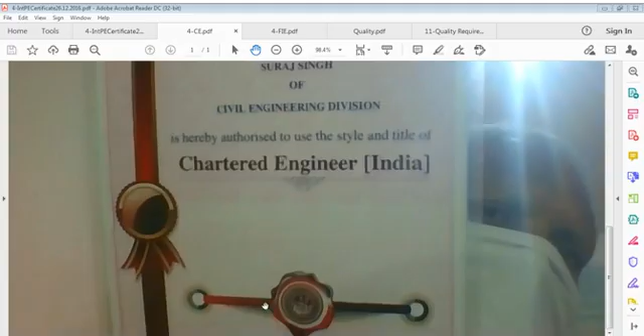Certification is an issue. We all have certain levels of certificates. For example, I have the Fellow membership certificate, FIE, given after long experience in engineering and post degree. This Chartered Engineer certificate is claimed by every corporate member of the Institution of Engineers, the Chartered Engineer India certificate. There is also professional certification for those who are well advanced and experienced, and use that expertise. I'm not an expert, but according to rules, I'm considered an expert.

Then there are varying explanations pertinent to quality - what is quality, why we consider this - and certain checklists for various activities in engineering and construction, particularly civil. More files and sketches will be displayed during this talk. So far I have delivered many related or non-related issues to you.

Meanwhile, I'll close these certificates because they will just hold memory or nothing. So I'm closing quality CE.

Now the question arises about quality - what does quality mean? Every day I take some time to define the approach towards quality. Every day my mind tells me to speak more and more on this issue, and that's all right. We speak because something comes to mind, and that should not be held back or arrested - it should be used. I think that's the best way.

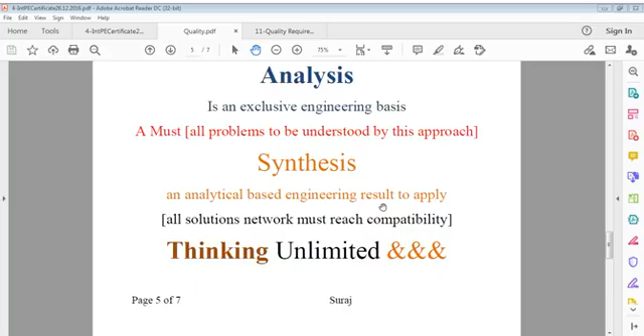It's very difficult to be constructive in this world. Constructive means you have to do a lot of work. You have to do a lot of work if you want to be constructive. And if you want to be destructive, I think it's not that difficult. You can go to someone and kill him. Maybe you are jailed, but you killed, you were destructive.

Construction or constructive activities are very difficult, not exciting. Every construction activity takes time, it requires energy, and it requires knowledge. Then it requires resources, only then we can construct. It's a long process, an intellectual process, a hard working process. We can do construction, but it's a long and time consuming job.

But destruction, just throw one bomb at someone and there can be destruction, that happens. So if you are a constructive person, I think you are a friend of God, or you can say you are supported by God, God shall support you otherwise also. But this constructive activity, I don't mean construction of buildings, I'm talking of construction of every activity based work.

All construction can be done only by those who are patient, who are ambitious, who are interested to help this world develop by their efforts, and those people are always criticized by those who don't want to work. I mean to say there are two kinds of people mainly: one who are work oriented, who are construction oriented, and others who either use construction done by others to claim it's theirs, or they only do destruction work.

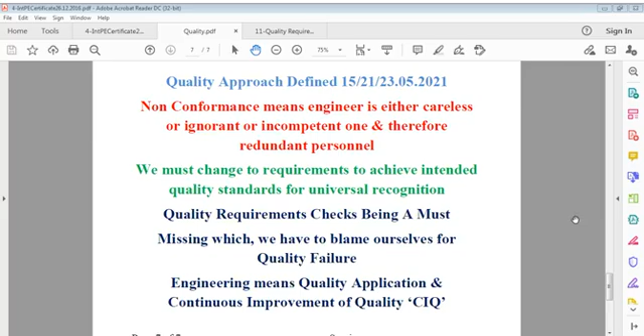To some level you are incompetent, but you worked. If all the time you repeat the same thing, in that case I cannot say that you are a good person, because a person who does work never ever expects that work should be incorrect. As much as possible, to practical limits, work is good, it is okay. That is the main point here. There can be no better definition to understand such analysis. So we can say non-conformance means an engineer is either careless or ignorant or incompetent, and therefore redundant personnel.

We must change to requirements to achieve intended quality standards for universal recognition. Meaning we have to change, we can change because standards change. I'm not much concerned about recognition, but my own recognition I have to do. If I can recognize myself, meaning I thoroughly check my work and I find errors, I try to correct that. That is also a kind of self recognition.

If I am self examiner, examiner is examiner, whether you examine yourself or you examine someone else, same principles apply. Only difference is that you don't tell others I have examined, I have tested myself. You test yourself or you test someone else. If you apply the same principles to yourself, you will correct yourself. Meaning self-study, self-search is very important for those mature people. For kids it's different, but for those who are professionals, they examine themselves, or at maximum peers check them.

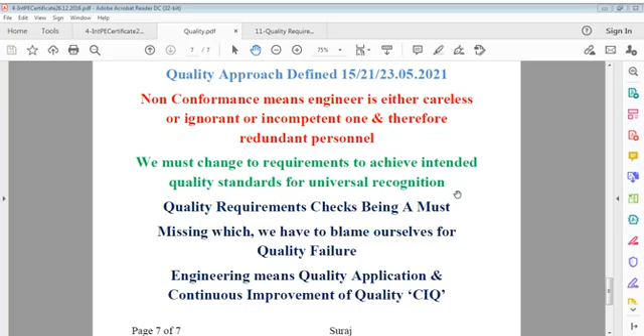Engineering means quality application and continuous improvement of quality. That is what I can say. If I want to improve quality, there is no way I cannot do it, and I have to do it. I have to do it, that is a must. There is no way, you have to do it because it is your job. It is your job, you have to do it.

This is the area for problem, and this is the area for solution. And gradually that format is developed based on your site experience, based on your success. And to get further success, that contemplated formula helps you. That is a very, very important point. Contemplation, that contemplation cannot be achieved conveniently. A lot of work is required to do that, and it's not easy for everybody.

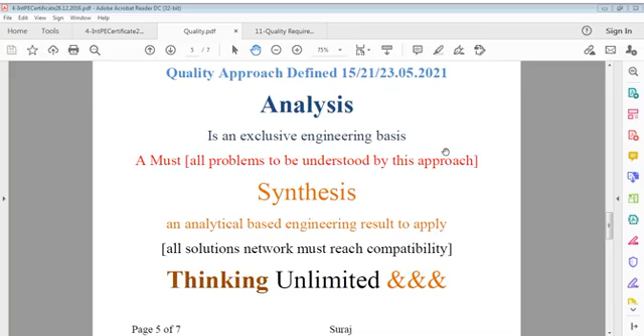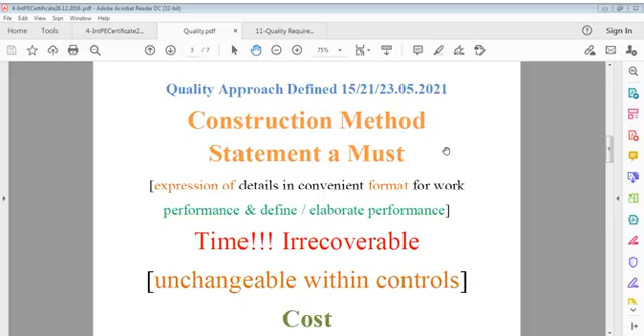Now, I think every day you cannot explain all this, but this analysis and thinking, I count this, and we apply this to our structures, our risks, our reliability. Many times I explain to you construction methods and designs of structures and others, which are part of my profession. Though I'm not an experienced designer, not that educated or experienced, I'm an ordinary person.

But this is a very important point: structures and designs must be qualitative. Qualitative means each step should be clear. Our relative understanding of material properties and materials, and our formulas, must all be clear and clearly applied, clearly understood, and then reapplied and re-understood. We can learn a lot by designing.

I don't mean to say you design like STAAD Pro or some other software. Design means your thinking of design, your assessment of design, what you understand by this. Sometimes we have to talk to ourselves to understand design, or talk to the structure itself, to understand how it's going to behave, how it's going to conduct. We can think this way or that way. And of course there are experiments, various tests conducted, models tested.

So design of structure is a different world. It starts with simple designs, very, very simple designs, and it goes to framing, and framing goes to multiple framing, and then it's called a structure, not a structural member. In every structure there may be hundreds of members, and every member has different properties, different applications, different formulas, and then of course material.

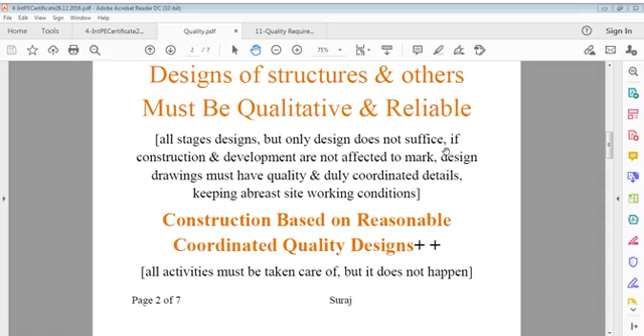Thinking has many ways, and I would not say all are good or all are bad, it depends. But as far as quality is concerned, I think no one has a right to compromise with this, because if you compromise, you don't just compromise quality, you compromise your conscience, your own faith, your existence. You should think that way, because I don't know what you get by spoiling quality, what benefit or achievement you get. I can't understand, and I don't want to understand that either, because unnecessarily wasting time is no use.

The world gives us time for positive works, for good works, for development works, not for unnecessarily making some good thing into bad, some good existence into bad. This is not taught by engineering or education. It's very important. So can I say quality is required everywhere? This cannot be defined, this statement cannot be defined that way, but in engineering it's a must, and if it's not a must, then your engineering shall fail.

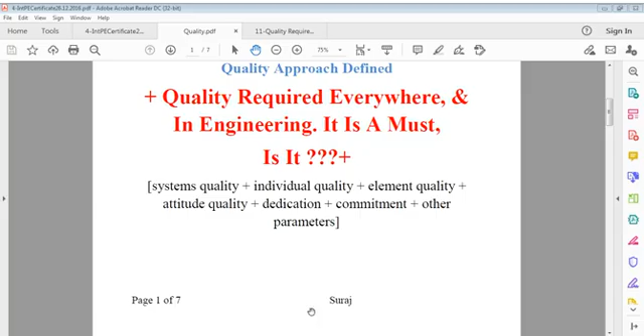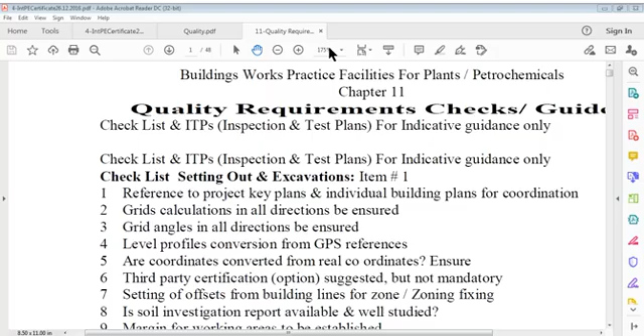That can be done. I think enough time today also I've taken for this part of the talk, and now I have to move to the other part, which is quality requirement. Again, we had discussed this yesterday, and we reached some point, and we had talked partially about that.

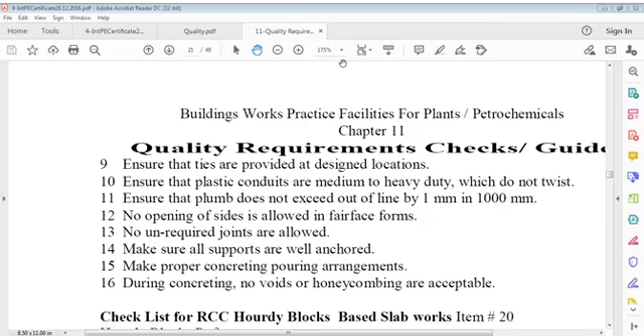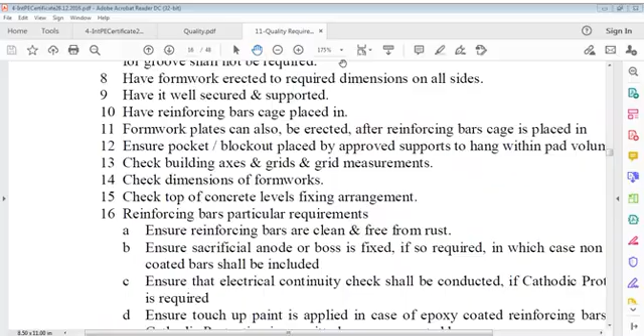What was left is, okay, I have to go a little back. Slab was over, and generator foundations, I think it was talking of something, or no? Yes, slab was over, slab over, pedestal footings. Okay.

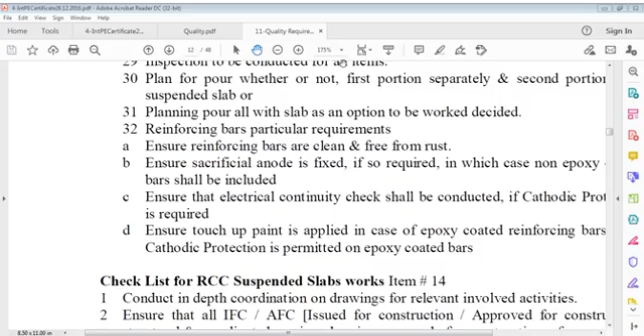Suspended slab. So this was over. Item number 14 was over.

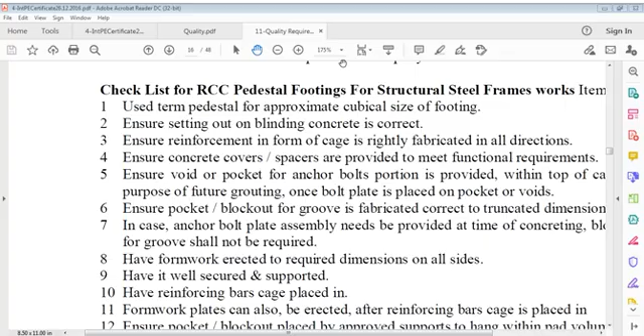So now, I think I spoke about this. Let us repeat this because it's very small, not a big one, it won't take much time. Contemplating on checklists, that's RCC pedestal footings for structural steel frameworks. This is not massive size footing. These are ordinary footings, but thickness or depth is more.

In this case, because there is embedment of structural steel framing columns into this footing, it's not that kind of footing of a building, RCC framing. It has to carry some bolts, you can say anchor bolts, or directly, even sometimes your structural column member could be embedded, but usually bolting is preferable, anchor bolting is preferable.

So what is done in particularly non heavy load bearing members of framing, small footings are done, for example 1 meter by 1 meter by 1 meter, or 1.5 meter by 1.5 meter, like that, depending on type, depending on soil conditions, and depending on so much. Where there is framing members up to 15 meters, 20 meters span, just framing is there, so you can say hall may be that much.

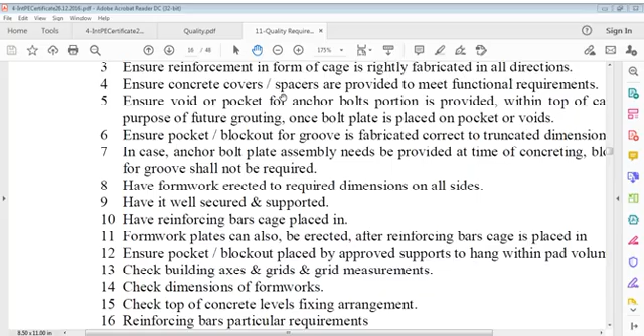So ensure reinforcement in the form of a cage is rightly fabricated in all directions, and ensure concrete covers and spacers are provided to meet functional requirements. Ensure void or pocket for the anchor bolts portion is provided, or grooves you can say, within the top of the cage, for the purpose of future grouting.

Once the anchor bolt plate is placed on pocket or voids, ensure the pocket blockout for groove is fabricated correct, or as designed, to truncated dimension. Truncated means the bottom portion is wider than the top portion, so that if friction is created, more value is created, and it is on all sides of that block, purely fixed on formwork, well anchored, with no disturbance during concrete.

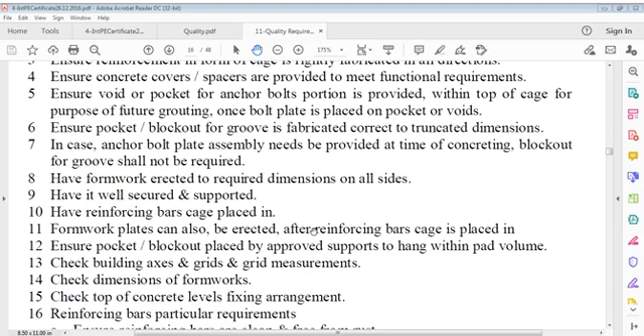So ensure pocket blockouts for groove are fabricated correctly, auto requirement to keep as close as possible to truncated dimensions. In case the anchor bolt plate assembly needs to be provided at time of concreting, blockout for groove shall not be required. Now have formwork erected to required dimensions on all sides.

Have it well secured and supported, meaning the formwork. Have reinforcing bars cage placed in. Now formwork plates can also be erected after the reinforcing bars cage is placed in, either way. Nothing wrong with that, because it's a small case and people can sit there like in a foundation, it doesn't matter.

Now ensure pocket blockouts are placed by approved supports to hang within the pad volume. These are the blockouts we have fabricated already, and we have to place them at the position where the anchor bolts have to come in, and we hang them with some lumber or timber pattern so that they stay stable and can be easily controlled during concreting.

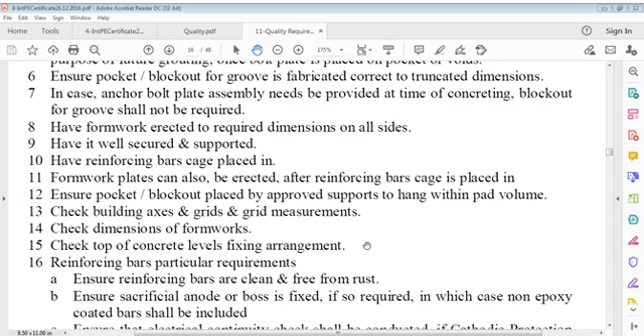So formwork plates can also be erected after reinforcement is placed in, and pocket blockout placed by approved supports to hang within pad volume, and check building axes and grid measurements. That's very important. As I usually said, we must establish axis on both directions, x and y, and then we can measure our grid distance from that axis.

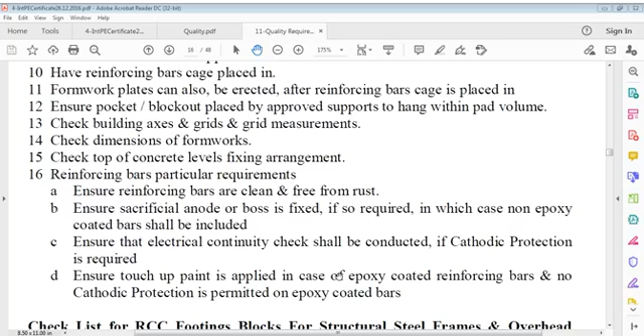Also check building axis and grid measurements, and check dimensions of formworks. Check top of concrete levels and fixing arrangements. Then reinforcing bars particular requirements, which is for all steel, and again that is there.

Ensure reinforcing bars are clean and free from rust. That's very important. Rust is very common in our country, and people least bother about that; unfortunately even engineers keep silent, for reasons I don't know. All rust should be removed from bars before being embedded in concrete. Ensure reinforcing bars are clean and free from rust.

Ensure sacrificial anode or boss is fixed if required by design, in which case non-epoxy coated bars shall be included. I mean, if you use non-epoxy coated bars, sacrificial anode can be placed in, and cathodic protection can be applied or inserted for corrosion control.

Ensure that electrical continuity test or check is conducted if cathodic protection is installed. And ensure touch-up paint is continuously applied in case of epoxy coated reinforcing bars, and no cathodic protection is permitted on epoxy coated bars. There should be no place left where the epoxy coat is broken or scratched. Whatever defect is seen on each steel bar, we have to keep epoxy coating paint applied at all times by small brush, and without that there's no meaning in embedding this bar in concrete. So this touch-up paint is a regular application on all bars.

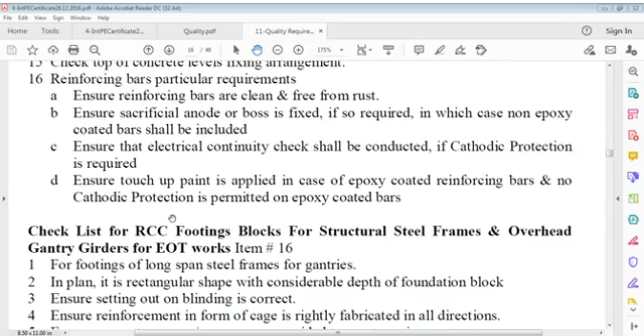We can now see the checklist for footing blocks for structural steel frame, or overhead gantry girders for EOT cranes, or EOC, electrical overhead cranes, or travelling, doesn't matter whether I've written EOT or EOC, you have to understand the basic point. For footings of long span steel frames for gantries in workshops or factories, in plan it is often a rectangular shape with considerable depth of foundation block.

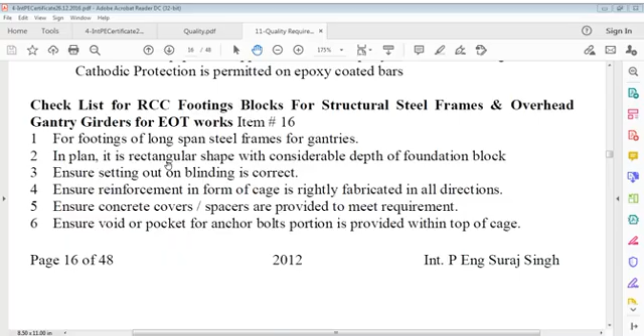Ensure the setting out on blinding is correct. Ensure reinforcement in form of cage is rightly fabricated in all directions. Ensure concrete cover or spacers are provided to meet requirement, and ensure void or pocket for anchor bolts portion is provided within the top of cage. These are same as before, so we have to repeat the same activity as we did before.

Ensure pocket blockout for groove is fabricated correctly, suitable and fittable to truncated dimensions. In case anchor bolt plate assembly needs to be provided at time of concreting, blockout for grooves shall not be required. If you hang your anchor bolts in prefabricated plate as delivered and cast in with concrete, there shall be no requirement of groove, and the bolts would be directly embedded into concrete. It can happen, but generally we don't do that.

Have formwork erected to the required dimensions on all sides, generally four sides. Have it well secured and supported, usually with the system discussed many times. Because you cannot bolt within that, we have to be careful so that sides don't open. That's the important point - sides should remain intact during work, with no movement and no bulging.

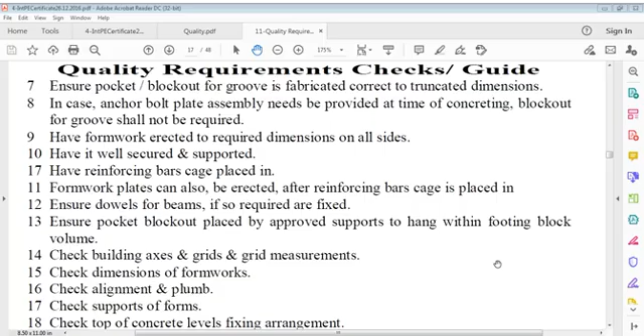Then ensure pocket blockout is placed by approved supports to hang within the footing block volume. If you use the installation of grooves method, you have to take care again - there may be many such blocks to be installed in one footing at different locations given in your design. Keep ready for inspection and pouring.

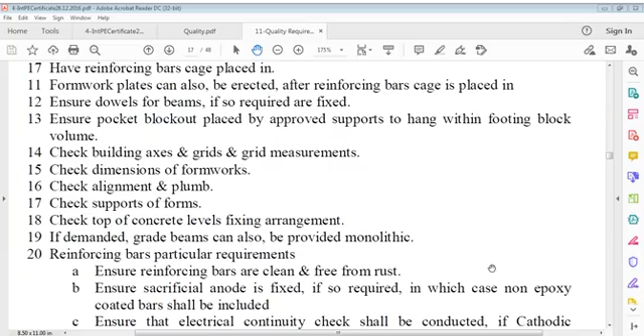Check building axis and grids and grid measurements. Check dimensions of the formwork that you have placed in. Check alignment and plumb as usual - there should be no deviation in alignment and no effect on plumb. All should be within limits.

Check supports of forms, and check top of concrete levels, fixing the arrangement up to which point you are going to pour concrete from these pads or blocks. Fix the top of concrete level by some method, by fixing beads or chamfer on that, or whatever means - put marks for the concrete people to stop concrete at that point.

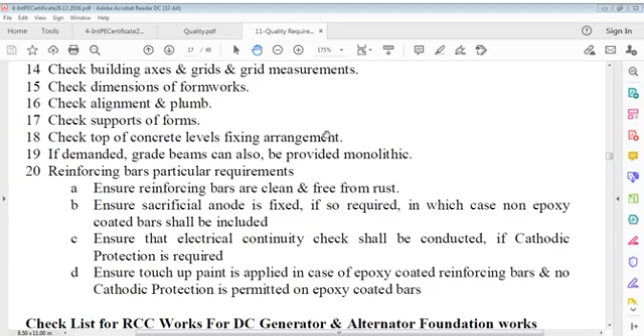Ensure reinforcing bars are clean and free from rust, as usual. No rust is allowed - you have to remove rust, no way out. If you don't remove rust and all dust, don't use these bars - remove them, or remove rust using a hard brush, rubbing on those parts, or taking out all those scales and coatings.

Ensure sacrificial anode is fixed if so required, in which case non-epoxy coated bars shall be included. This means when sacrificial anode is designed to be installed, epoxy coated bars would not work.

Ensure that electrical continuity check or test is conducted if cathodic protection is installed. Because there are C clamps on each bar, all these clamps embed a GI wire, and continuity of this activity of anode and link to cathode is done through this wire, which is moved around all steel bars and fixed. Then we ensure the electrical continuity check test is conducted.

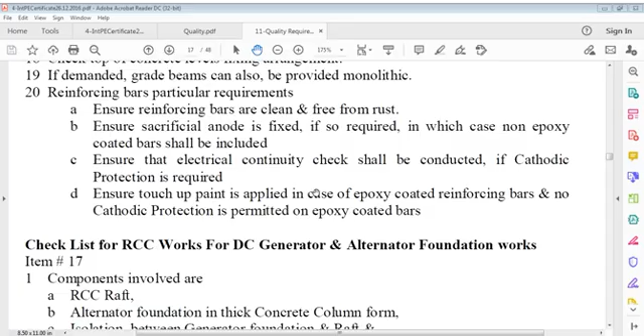It's a very simple statement, nothing too specific in this. You can understand this item, it's a very good item you may say. Then we'll talk of DC generator and alternator foundations. Let us see if I can find something, I will be happy.

In this case, I can say possibly I will not find that one. I'm trying to find it. I will try to tell all this as much as possible.

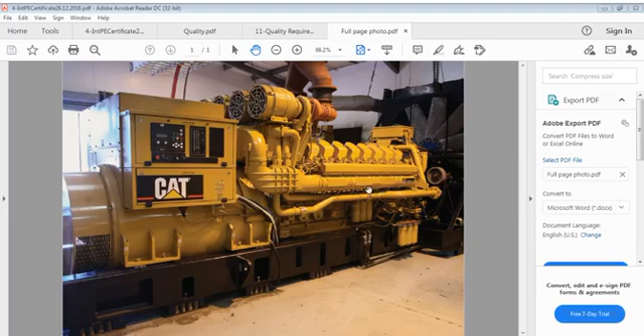I'm not talking about the mechanics of this, you know that there's so much in that. You see these points here, right? These points I'm talking of are shock absorbers. These shall rest on something, on some hole. This machine is very vibratory. Impact shall be transferred to the foundation, and that foundation I'm talking of.

This machine, first of all, is a generator, and this shall be connected to an alternator through some system of work, but independently this would work. This is all a mechanical system. These are all frame of this frame, and this vertical part is shock absorbers. Now this shall rest on some frame, and that's foundation.

There shall be an isolation between this foundation and foundation of this machine, that's the frame block, a massive block which shall rest on raft, and there shall be an isolation arrangement between raft and foundation of this machine. This means on top is the massive block, below the massive block is the isolation arrangement, and below that isolation arrangement there shall be a raft. The alternator foundation shall be integrated with the raft in a monolithic way.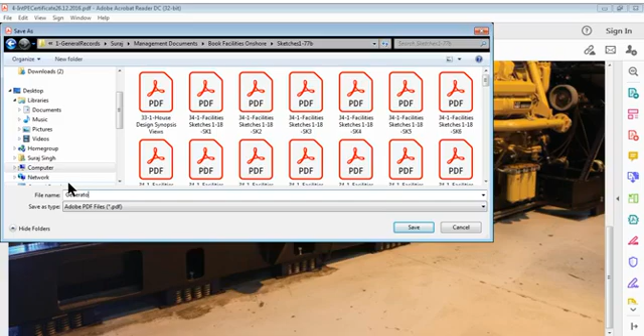We have to provide a foundation system for this, meaning a system where there is a machine of generator and alternator. We have to form that one for this machine. This is what I am going to talk about.

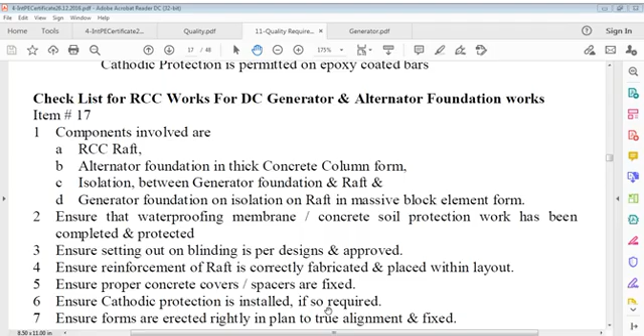A massive block directly below this, and below the massive block there is isolation, and below isolation there is its real foundation. This massive block is the supporting foundation, and that raft is the distribution-of-load foundation, because the raft shall distribute static load, while this massive block shall dampen all its impacts, and the isolation block shall try to dampen further. This is what I understand, and this is what I am going to talk about in this activity: RCC works for DC generator and alternator foundation works.

We have to discuss this one by one, and that's a very important part of this.

I have this block in my book, but that's not here with me, and I don't have any file where I can see that. Sorry, this is another sketch, I have to see that one as I'm talking. House design, I wanted to show you if I can have that, but I don't have that one. So no problem, I will now go this way and see what we can say about this.

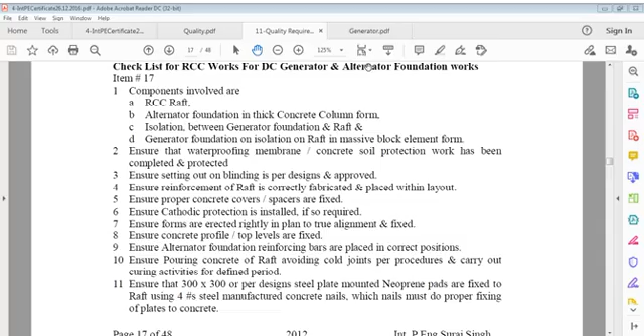So now we start about this item, which is very important. I did this myself long back, but with different technology at that time. This is a very important item.

What I want to say is: checklist for RCC works for direct current generator and alternator foundation works. There is a combined type foundation for both generator and alternator in the form of a raft. On one end, say the left end of this long raft, there is a thick column on which we have to mount the alternator.

On the other part, away from the alternator column, say 1 to 1.5 meters, we have an isolated mounted massive block. This means that massive block is not connected in any way to the raft, but isolated from it by an isolation mechanism sandwiched between the raft and the massive block. On that massive block, our machine has to be connected through a bolt system.

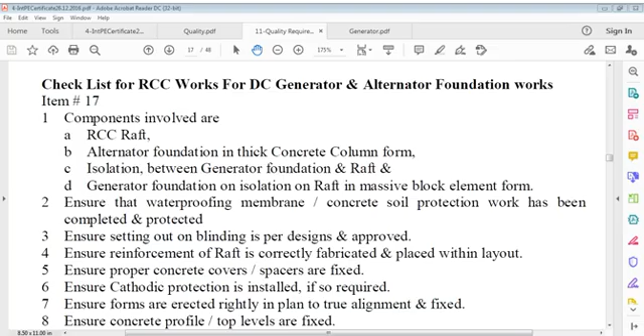Now the components that they have, components which you can enlist: one is the RCC raft, the other is the alternator foundation in thick concrete column form.

Thick concrete, you may question, it's easy to answer, but let me finish this first. Then there's isolation between the generator foundation and the raft. Generator foundation means the massive block and raft, and generator foundation isolation on the raft in massive block element form. So these are the points here.

Now there are 2 points: thick element of RCC and massive block. You may ask this question if you do not know, it's fine if you do. Thick element means whatever RCC member has a least dimension of 800mm or above.

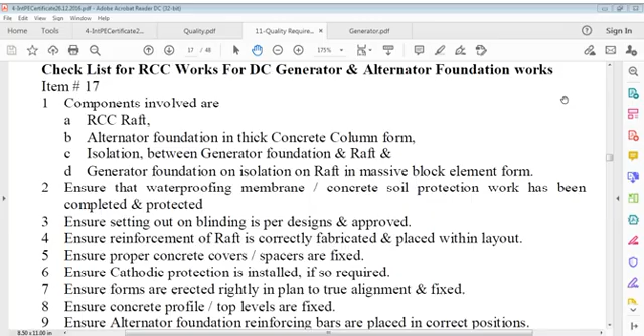Now we again go to the same excavation, which we assume is done, everything is done. We are not going to repeat all those. Just start with the waterproofing membrane or concrete soil protection work that has been completed and protected. We assume that.

Now setting out on blinding is according to designs and approved. Blinding is already over.

Reinforcement of the raft is correctly fabricated, we assume, and placed within layout. It is not easy, but we have to assume reinforcement is according to structural design. The site has received reinforcement of the raft, probably fabricated, or fabrication can be done in the site yard - reinforcement concrete steel.

There are two yards: one for formwork and one for steel bars. Steel bar people fabricate steel, cut and bend according to design, and those who work on formwork fabricate it according to dimensions.

Proper concrete covers are needed, and these must be fixed on the steel. Wherever required in the case of the raft, it is done below the steel of the raft, and also above as well as on the sides, where the thickness is not much - it may be 400 or 500mm.

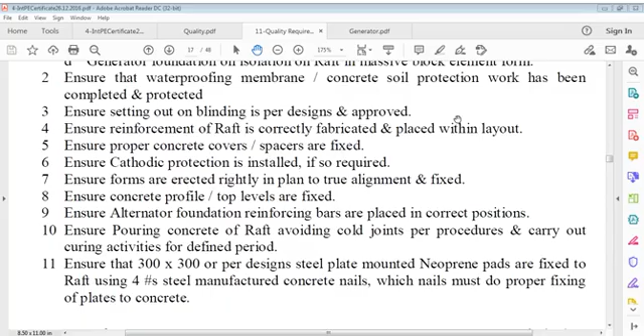Ensure that 300 by 300, or as per design, steel plate mounted neoprene pads are fixed to the raft using 4-number steel manufactured concrete nails. We'll take this up now, it's a very important issue.

After this, the nails must be properly fixed. This is after the raft is done, after curing is over, everything is hardened. So we have to follow the design, and we must get these pads when we procure material for this foundation isolation, because these neoprene pads are a form of isolation.

These neoprene pads are fixed on steel plates of 300mm by 300mm, or whatever design, with 4 holes at the corners. The 4 holes are meant for the purpose of steel nails.

So we generally call them concrete nails in our field. Concrete nails, though these are not made of concrete, but are made for the purpose of connection to concrete, because these are made of steel, and the point of steel can penetrate into concrete, and that's the reason we call them concrete nails. But these are steel nails. Other nails which are used for timber work, wood work, those are wrought iron nails. These are steel nails, and that's the only difference.

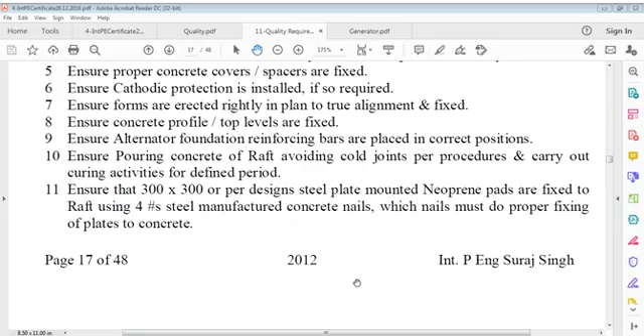Around this neoprene pad, 4 holes are provided for the purpose of nailing to concrete. So ensure that the 300 by 300 mm, per design, steel plate mounted neoprene pads are fixed to the raft using 4-number steel manufactured concrete nails, which must do proper fixing of plates to concrete. This is a very important item.

Now you have to check that polystyrene rolls are spread on areas of the raft, but saving areas covered under the neoprene pads, so that the prefabricated lamina plate rests on polystyrene. This is important to understand. What I'm saying is, but I don't have a sketch, I'm regretful for that.

But you fix these pads like concrete nails, then you have flexible polystyrene rolls, heavy duty rolls - polystyrene rolls, not extruded ones, different ones - and these are spread on the whole area, and we have to cut out within this span. These pads are in the way, so the surrounding pads we have to cover with the polystyrene roll, so that the prefabricated lamina plate rests on polystyrene. Provide a neoprene rubber sheet, the same rubber sheet, on the whole system laid on the raft.

So you have laid these neoprene pads with steel mounts, and you have laid the polystyrene roll, and now the neoprene rubber you have to lay. These are the three items we have laid on that raft. Now place the following: the fabricated plate based on laid system. This fabricated plate or lamina is to be laid on this system, reinforcing per particular requirements. This fabrication of plate I'll discuss separately.

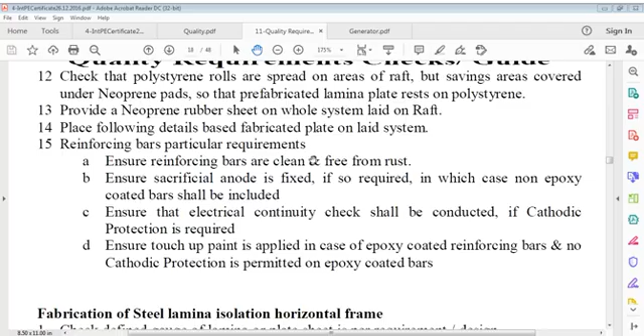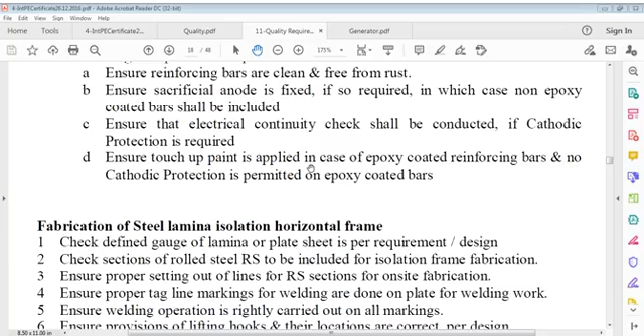Now, just because we have provided steels, we have the same comments: ensure reinforcing bars are clean and free from rust and dust. Sacrificial anode is fixed if required, in which case non-epoxy coated bars shall be included. Also ensure electrical continuity check is conducted if cathodic protection is required, and ensure touch-up paint is applied for epoxy coated reinforcing bars. No cathodic protection is permitted on epoxy coated bars.

Fabrication of steel lamina isolation horizontal frame. This is a very important item actually, and this is what isolation is all about. You have to understand this. Fortunately, I was personally involved in one such item, back in 1984.

This horizontal framing, the lamina and angles, was supplied as rolled steel angles, mild steel, and the fabrication design was given. I took my own interest in that, because you cannot depend all the time on fabricators for everything. It was a very technical issue.

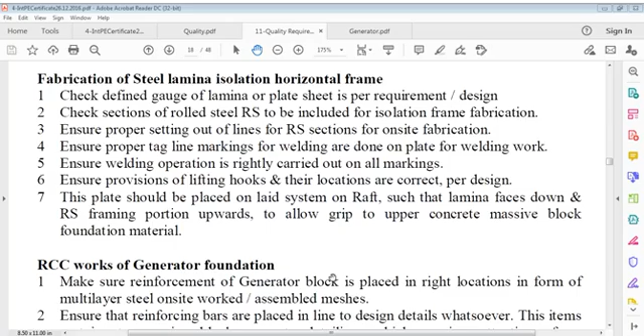Now we go to RCC works, generator foundation. It's very important one, generator foundation, not so simple as we think. It's very much - nothing you can read for 5 minutes at the back, because first reading is important. You may not read when I speak, so better read it now.

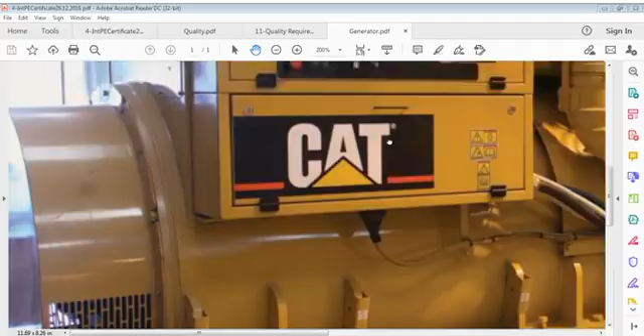So we are back here, and say RCC works of generator foundation. And generator, you have seen what I said. It was this one, which you can see in this sketch again. I can blow it more and more, and you can see how does it look, what is the structure. It looks like, you can see it's like a train there.

You can see shock absorbers like train bogie, and you can see it is, I think, CAT, though I do not use CAT. Well, it's just a question of understanding what we say, what we do. So this is that.

Now, RCC works of generator foundation. Make sure that reinforcement of generator block is placed in the right locations in form of multi-layer steel on-site worked, assembled meshes, right? Make sure reinforcement of generator block is placed in right locations or required locations in form of multi-layer steel on-site worked, assembled meshes.

Ensure that reinforcing bars are placed in line to design details whatsoever. This item pertains to massive block concrete detailing, which requires attention of an experienced engineer or pragmatic foreman who can personally attend to direct its installation, because it being a machine foundation design based on foundation counter weighing. A little complicated one, but we have to understand this as well, because understanding is very important. We have to understand so many items, so many issues.

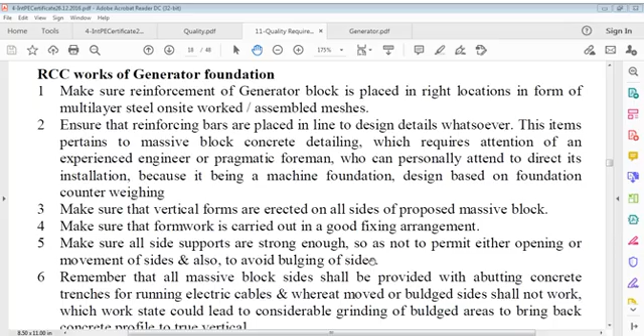I don't think moment of resistance or bending moment are that important in this. It is not, because depth is around 2.25 to 3 meters. So though it's quite a heavy item, it's meant for dampening effect, to achieve dampening effect of vibrations. That's the main purpose, and to avoid, you can say, resonance.

Natural frequency of machine and operating frequency of machine should not tally - that is called state of resonance. You may have forgotten, but operating frequency and natural frequency should not meet together. Operating frequency means frequency imparted or transferred to foundation by machine, and natural frequency means that produced by foundation. Both must not be same. There should be a difference, and what difference should be there is specified in designs, up to 2. So make sure we have to be concerned about that. That's the reason the massive foundation is there.

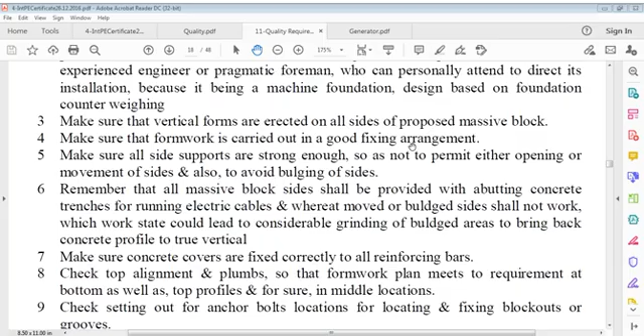All massive block sides shall be provided with abutting concrete trenches for running electric cables. Where moved or bulged sides occur, that work state could lead to considerable grinding of bulged areas to bring back the concrete profile to true vertical. Make sure concrete covers are fixed correctly to all reinforcing bars. Check top alignment and plumb so that the formwork plan meets requirements at bottom as well as top profiles, and for sure at middle locations.

Check setting out for anchor bolt locations for locating and fixing blockouts or grooves as usual, and also for machine foundations where plates and bolts are for installation. If grooves are prescribed in design, provide them according to dimensions given by the designer, since dimensions vary, and these grooves should be properly fabricated of timber. If prefabricated grooves are given, fine, but often they are not, so you have to arrange timber grooves yourself, because this can be broken later. If it's a steel groove, it will remain inside and cannot be taken out.

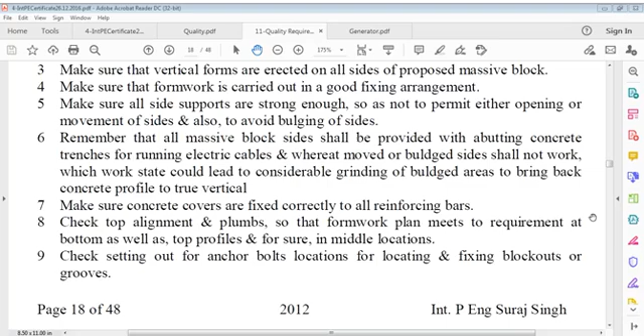Make sure the concrete covers are fixed correctly to all reinforcing bars. Check top alignment and plumb so that the formwork plan meets requirements at bottom as well as top profiles, and for sure at middle locations as we discussed. Top and bottom profiles must be supported by a system that keeps these profiles intact in dimension, orientation, and location. Also check setting out for anchor bolt locations for locating and fixing blockouts or grooves.

Then we move to a further check, and that is checking blockouts and truncated formwork. Check that these blockout forms are fixed in exact position, are truly vertical, and are well anchored so as not to move out of the fixed position.

Make sure about providing cathodic protection if required. In case of cathodic protection, provision continuity tests should be conducted, and that must be done - cathodic protection provision continuity testing.

The activity of pouring and curing is also required here. Every activity must be inspected by a competent person - a competent authorized engineer and a competent quality person - because everybody has to be responsible. So the activity of pouring and curing is to follow the concrete pour plan, which you have to develop yourself. Of course there are ways, and we can show it.

And of course, in step pouring, which I'll show you again, so as to avoid cold joint formations - step pouring is very important. I've shown it many times, I can show it again, it's not a big deal. Let me check if I have that.

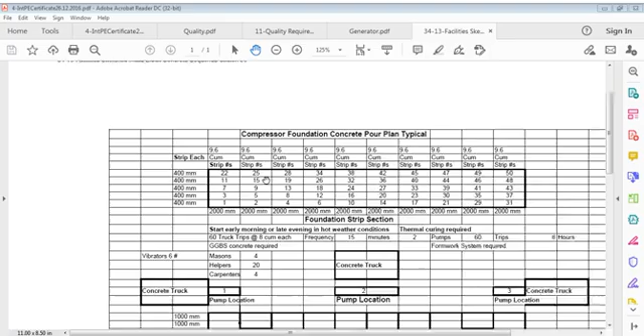Well, I'll take a photograph, I'm going to take this sketch. Let us see this. I don't know why I missed this last time as well, let me do it again. I'll show you just now. This is the important one, and this is the art one. Just for your reference, I'm showing how this should be poured.

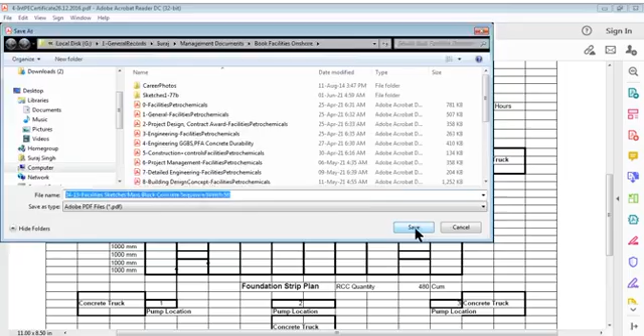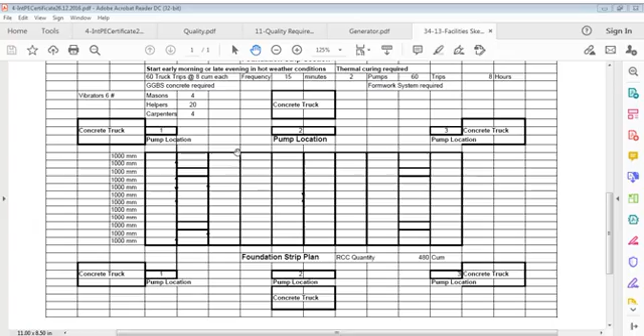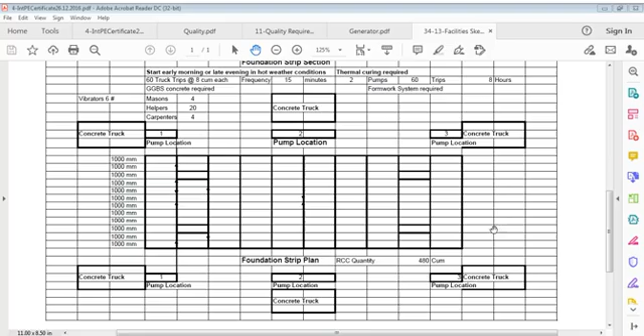This is a section of this, and of course it's a different foundation, but it's a massive block as well. You can see whatever sizes there, you have to go into detail like this. Say 2 meters to take width, and you have to pour this layer. This is a plan actually, and this is just strip sections.

The sequences we have to fix means all cold joints should be avoided. That's the only way it is done, not otherwise. And if you do it fully in one go, then you will face problems.

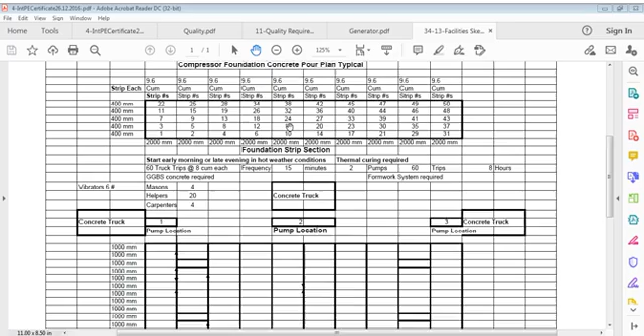Many problems will be faced. Even if you are using concrete pump and fully concreting, say you concrete from here to here, then move further, pour this, and come back to pour this - it doesn't work. At one time you will get cold joints, and at that point the pressure will increase. I'll discuss this later on. It's just for information, I tried to show you this, and I think you understand what I mean.

So as I said, we are here. I put this file off because it's not required at the moment. You can put this file off - why waste unnecessary time?

Check blockouts, truncated formworks - these must be in vertical position and anchored well, and not move out of fixed position. Make sure about providing cathodic protection if required. That depends on the project - if required, you have to do it; if not required, don't do it.

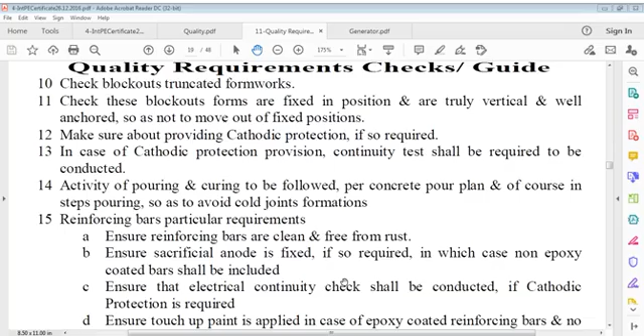Make sure about providing cathodic protection if so required. In case of cathodic protection provision, continuity test shall be required to be conducted, and the activity of pouring and curing is to be followed per concrete pour plan, in steps, so as to avoid cold joint formations, as I explained just now.

Reinforcing bars, particular requirement as usual - I just repeat, it is the same.

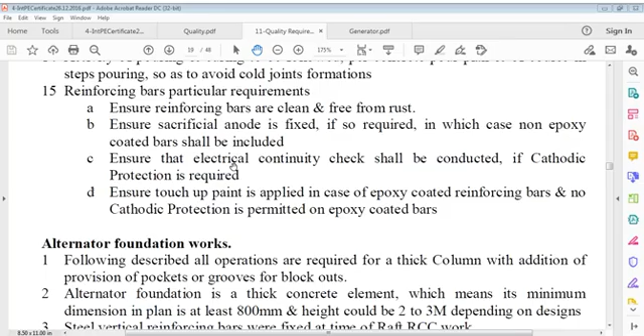Ensure reinforcing bars are clean and free from rust and dust. Ensure sacrificial anode is fixed if so required, in which case non-epoxy coated bars shall be included. Ensure that electrical continuity check shall be conducted if cathodic protection is required. Ensure touch-up paint is applied in case of epoxy coated reinforcing bars, and no cathodic protection is permitted on epoxy coated bars. These are precautionary measures.

Now, alternator foundation.

Following described, all operations are required for a thick column with addition of provisions of pockets or grooves for blockouts. Meaning, we are going to construct a thick column - not a column of that type, it's like a big pedestal.

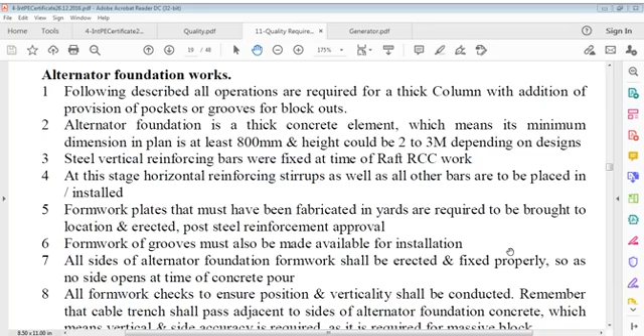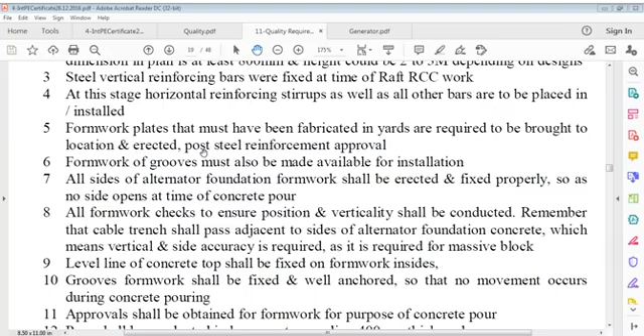So all sides of alternator foundation formwork shall be erected and fixed properly so no side opens at the time of concrete pour. All formwork checks to ensure position intact and verticality right shall be conducted. Remember that cable trench shall pass adjacent to the side of the alternator foundation concrete as well, which means vertical and side accuracy is very much required, as it is required for massive block.

Level line of concrete top shall be fixed on formwork inside. It can be by beads or whatever means. It should be clear to the mason up to what level this concrete is to go or rise. Grooves formwork shall be fixed and well anchored so no movement occurs during concrete pour. Approval shall be obtained for formwork for purpose of concrete pour.

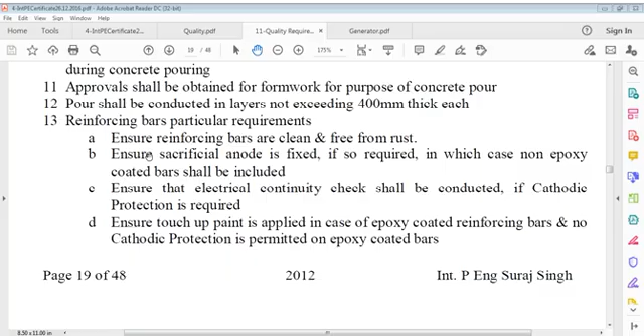Pour shall be conducted in layers not exceeding 400 mm thick. That we'll discuss in reinforcing bars particular requirements, that is, ensure reinforcing bars are clean and free from rust. Ensure sacrificial anode is fixed if so required, in which case non-epoxy coated bars shall be included. Ensure electrical continuity check is conducted if cathodic protection is required. Ensure touch-up paint is applied in case of epoxy coated reinforcing bars, and no cathodic protection is permitted on epoxy coated bars.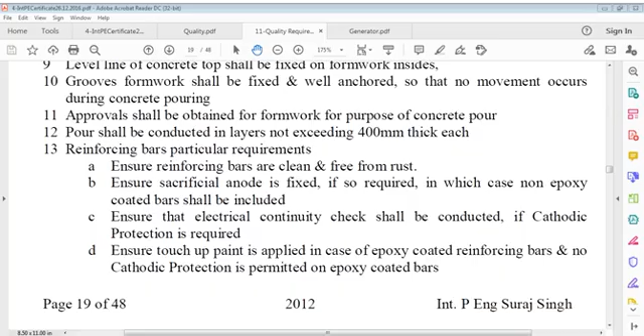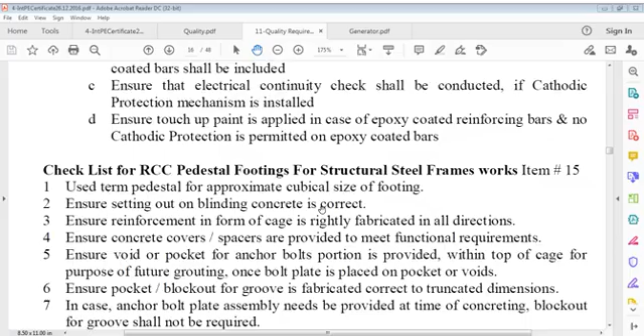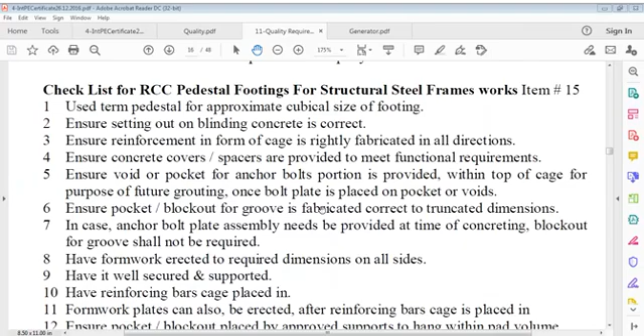This we discussed for certain important items. Important items these are, and we should understand that point. It's very much important. This we discussed, and you can say what did we cover when slab was over - I think that was the slab. So we covered pedestal footings, two types, for structural framing without gantry and structural frame with gantry both. We considered both items, very small description. Then we considered generator and alternator foundations, which are also very important.

If I try to find something, maybe I can't see that. Let us say generator, alternator foundation. There's nothing as such. I think something appears here. Let me see this image. What does it say? Oh, there's so much in that.

Doing something else here. What is this? It doesn't usually ask it, it doesn't do that. Okay, here it is. Let us see if you can say this. HTML is, why it's HTML? Problem is you cannot get some references directly, it's a main problem. It's not giving a result. I'd like to give one reference for your reference only. Oh, it's very small, yet something is written on that. We'll see. No, it's not giving. It's giving something else. Let me try what it says. That's also important, what it says, let us see.

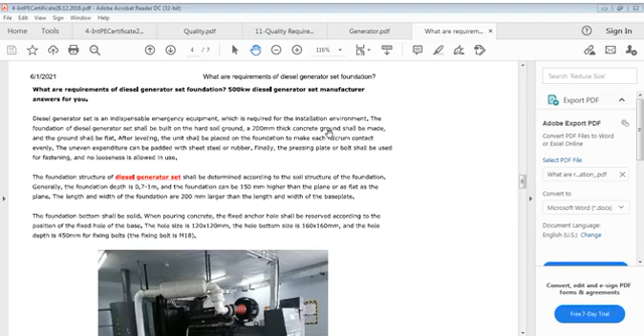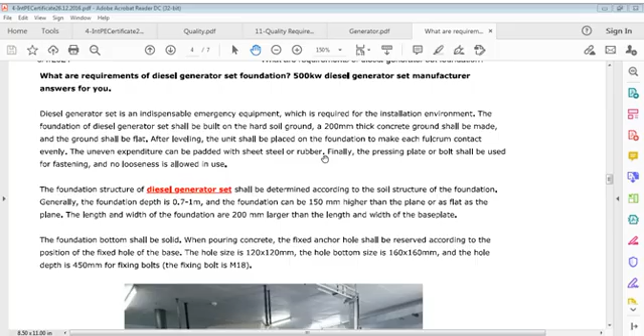What are requirements of diesel generator set foundation? Diesel generator set is an indispensable emergency equipment which is required for installation of environment. Foundation of diesel generator set shall be built on hard soil. A 200 mm thick concrete ground shall be made. Oh no, this is rubbish, leave it behind, I cancel this. I was talking something reasonable and it should be heavy. It's not giving me that one, so I close it. It's rubbish.

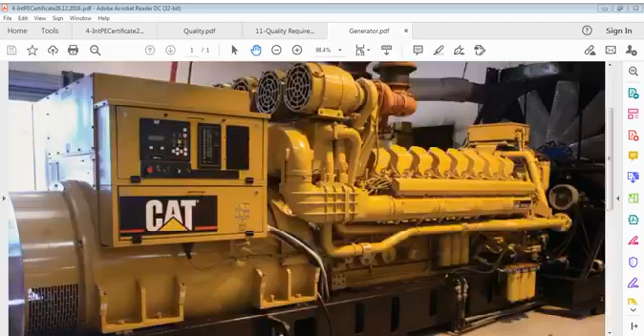Alright, we'll move ourselves. You cannot depend all the time on such a big generator, you cannot depend on small foundations. Then we discussed generators, alternator foundations, and these are for power stations. I'm not talking of small generators for homes, for factories. We are talking for power stations, which have major profile generators, major capacity generators, maybe 4, maybe 8, depending on requirements. If you have 4 generators, 2500 kVA, and 10,000 kVA you have. So like that, we are talking of a powerful generator, having alternator, having oil tank and radiators with that.

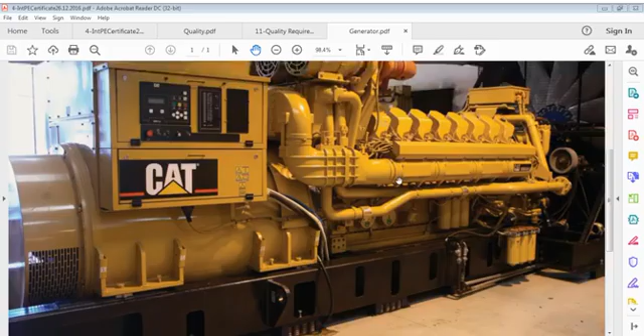All these are required. It's a very important point you must care about. We cannot simply go by what others say, we have to think ourselves what we are talking of. This generator which I showed you is again the same - it's maybe now, but I'm talking of the big one which was available in those days. And this is a heavy machine which requires heavy input, and that's a very important point. So I put this off also now.

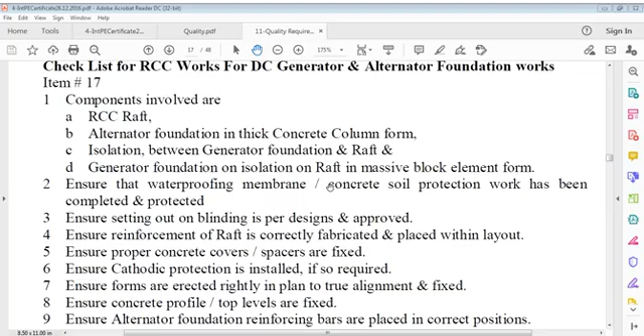It's very important that we understand such activities in clear terms. We have to plan accordingly; it's not simple work. Planning engineer, site engineer, and all quality engineers involved must sit together and chart out a strategy to see how this work can be done the best way. All minds should talk together, because even if I work there, you work there, everybody has duties. You have to go there and see the work.